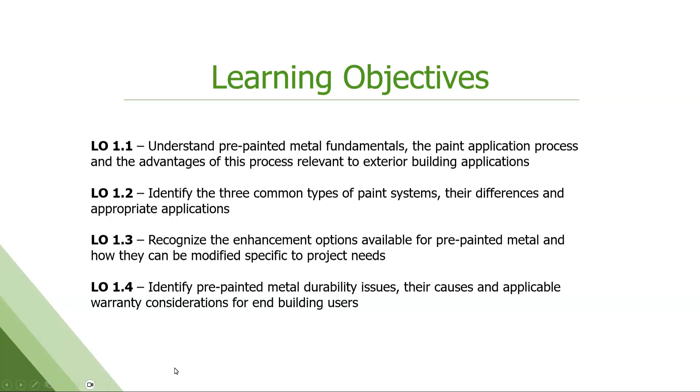So again, pre-painted metal fundamentals, the application process, how we do it. We'll talk about paint systems in detail a bit, their differences and appropriate applications. We got a section about enhancement options, both design aesthetic enhancements, but also performance enhancements that are available. And then we'll wrap it up with durability, warranty, how to maintain these coatings and metal out in the field.

So what is pre-painted metal? I mean, it's pretty self-explanatory. Pre-painted metal is rolls of steel or aluminum, usually, that has paint applied in a factory setting and is baked on. And this occurs prior to any final panels, pieces, parts, and shapes being made out of that roll of steel or aluminum. So not all pre-painted metal is the same. Selecting the right substrate and the right coating, which is what we're going to focus on today, affects product lifespan, energy efficiency, visual appeal, etc.

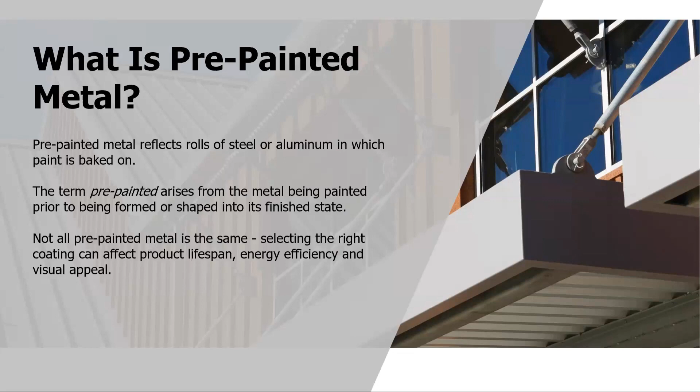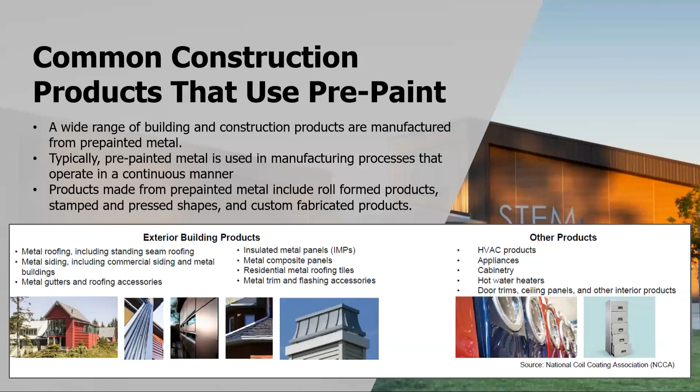Some of the more common construction products that use pre-painted metal, obviously exterior building products, metal roofing, siding, walls, but also gutters and downspouts, accessories that get used in buildings, insulated metal panels, composite panels, trim and flashing. Those are the ones we're going to try to focus on today. But we also use this product in HVAC products, appliances. Almost all of your appliances are pre-painted metal done by the coil coating process, cabinetry, hot water heaters, door trims, window trims, a lot of other interior stuff. Metal furniture is almost all made out of pre-painted metal through the coil process.

It is a continuous process. So we connect one coil end to end to another and keep running as much as possible. But the coil starts out, enters the line, goes through a cleaning section, gets it nice and prepped for receiving paint. We do use a pre-treatment that goes on to create a good bond with the paint. We put a primer on that gets baked on at high temp. After that, the finish coat gets applied again at high temp very quickly.

Speeds are anywhere from 100 up to 700 feet per minute, depending on which specific line we're talking about. So it can be very, very fast. The curing process, that is from the time the paint is applied to the strip until it is dried and fully cured, is 15 to 30 seconds. So these are chemical reactions that are taking place. They are not air dried like house paints that we use.

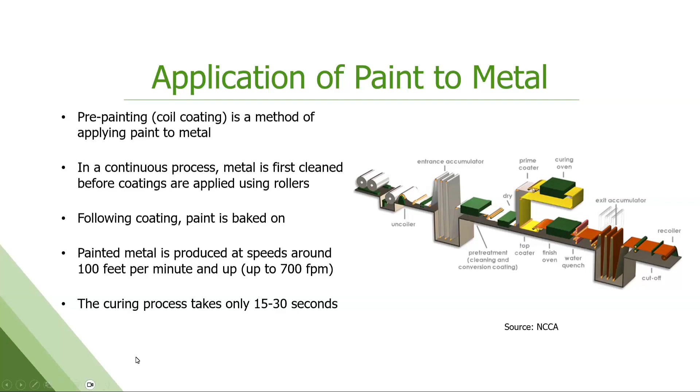If you rolled some of this paint on a piece of metal and set it out in the sunlight, years from now, it would still be wet. It would never actually dry. So very different chemistry. There's a lot of advantages that come with this process, mostly because of the size and the speed in which we do things and the way it's controlled. So it's a very repeatable process. All the processes are very tightly controlled, so we get very good repeatability of the coating and the performance.

It's a very efficient use of paint. So total paint on the top side and the bottom side of the strip is only about 1.4 mils, so 0.0014 inches. That's thinner than paper. We can measure that small and we can reproduce to that. By comparison, most other industrial coatings or metal coatings are 2 to 5 mils in thickness, so a lot more paint that goes on. Another comparison would be cars, right? So cars are kind of in that 3 to 5 mil range of thickness. So a lot more paint is applied.

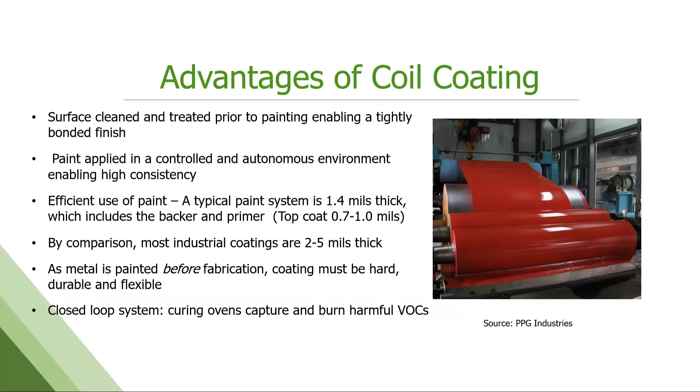All of this is done before fabrication. So these paint systems, these coatings have to be hard, but also durable and flexible to go through the forming process and get made into whatever final panel or piece or part they need to be. It is a closed loop system. So these are solvent-based paints. We're going to talk about that a bit more in detail later, but those solvents are driven off in the ovens and are captured and incinerated and or used to reheat the oven. So it is a closed loop system. The final product is VOC free.

With great speed and size comes some limitations. You know, it's very rapid, it's very large. That makes it difficult to do very small quantities. These lines are anywhere from, say, 1,500 to 3,000 linear feet of product from end to end. So it's very hard to just paint, say, a couple hundred feet. So it's an economy of scale situation.

This can limit the color palette, although I can tell you that Steelscape currently has about, I don't know, 32,000 different colors on file. So not a huge limitation, but, you know, custom colors, exotic colors, small runs are going to cost a lot more and have a lot longer lead time and may actually not be feasible for all coil coaters to do.

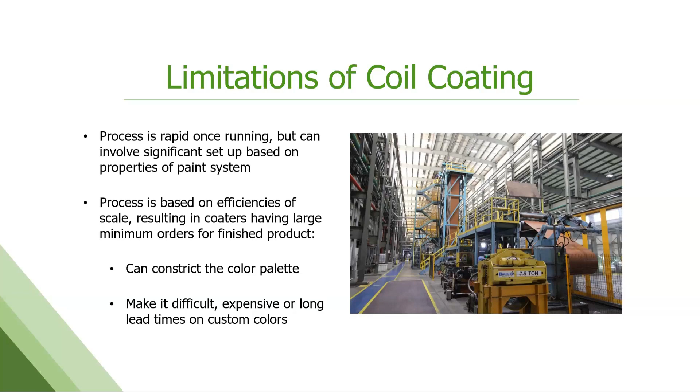Pause here real quick. So again, we talk about how fast it is. You can look up videos online if you're curious. The National Coil Coating Association's got some really good videos on what this looks like and the size of it and how quickly it operates.

Again, a single car today to coat all of its parts is anywhere from 30 minutes to 2 hours, depending on which kind of car and which assembly line it's on. I can run an entire coil of steel enough to produce 4, 5, 6 very large buildings or more in about 15 minutes. So we get a lot of product very, very quickly off the line.

Whoops. Oh my God. Sorry, I went too far.

So quality control - again, we talk about the advantages, really tightly controlled, both the performance and the aesthetic look of it. So we try to simulate the forming it's going to go through downstream to our customers. We bend it, we bump it, we stress it.

We do a lot of color validation and gloss, that's the aesthetic side, right? That color's got to be consistent, not only within a coil, but coil to coil, from edge to edge, from order to order. If I paint red number 5 today, when I paint it again next week, it needs to look exactly the same. There can't be any visual differences to it.

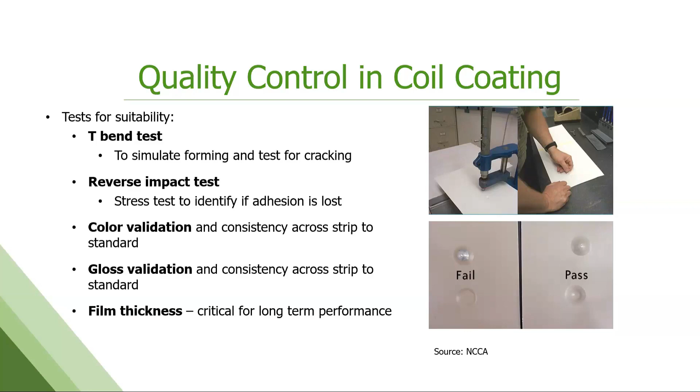I do want to spend a few minutes before we jump into paint, which is the bulk of this presentation, to talk about the substrate underneath, because it's quite important.

Coil coating, like I said, is mostly coated steel or aluminum - I'm going to focus on steel here. It's either galvanized, which is a zinc coating, metallic coated steel, or an aluminum zinc coating, which would be galvalume or zincalume. Those are trade names you'll see out there that are specified and written into specs. It's a 55% aluminum zinc metallic coating that has superior corrosion resistance compared to galvanized. There's a whole other AIA presentation on that if anyone's interested, that I do. But you will see these trademark names in the specs from time to time.

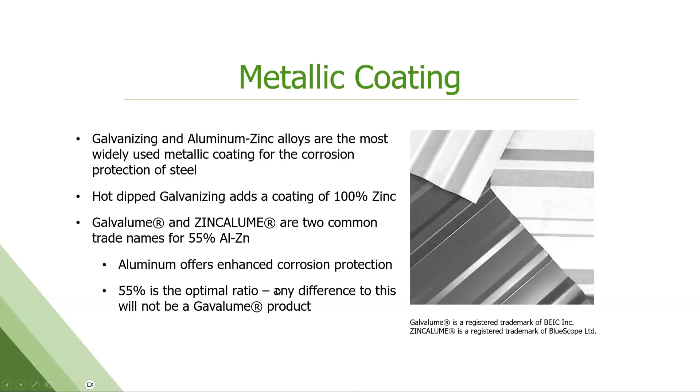We do this in a similar fashion as painting - it is a continuous line, moves very, very fast. They're actually much larger than the paint lines and move much faster, like 300 to 500 feet per minute or more. We're annealing the steel prior to metallic coating to get the properties that we need of the steel, and what its yield is going to be, how elastic it is, how it's going to form. And then we're also applying this metallic coating on that same line.

Different coating weights are available, and they affect warranty and how you're going to use it. Most galvalume or aluminum zinc metallic coating at this point is - I actually need to update this - 20-25 years, it's actually going to move up to like 40-50 years just in the recent months on this product, so I need to update that. But where you install this product is going to affect that warranty, and again, at the end of the presentation, we'll talk about that a bit more.

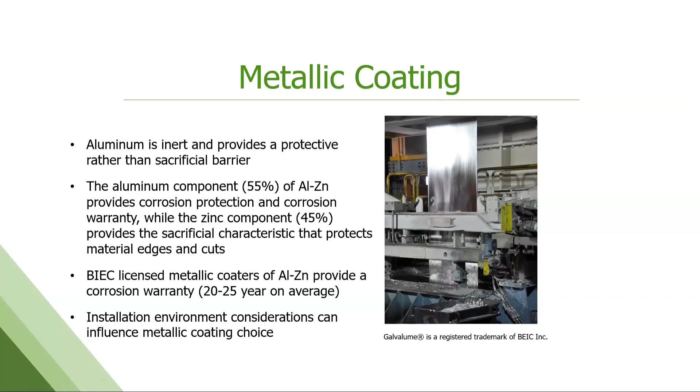Okay, paint - what is paint? We all know what paint is, right? We've all dealt with it. It's a liquid, you apply it to a surface, it needs to cure and dry into a solid film. We want it to protect the surface, and we want it to look a certain way. We want to design with it, we want to create with it. So it needs to have the right color and the right look and the right gloss. Maybe it's sparkly, maybe it's a matte finish, whatever the designer wants.

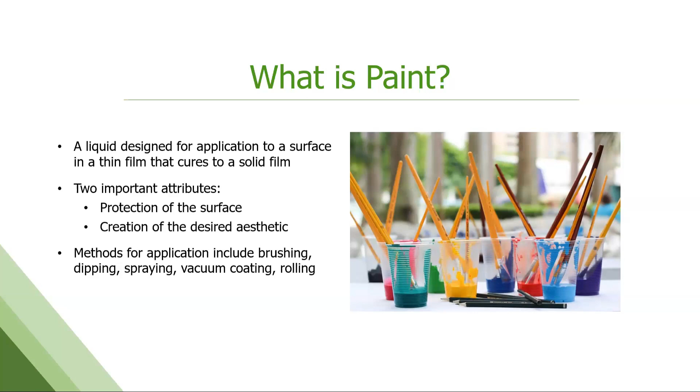There are 4 primary components of paint. Resins, also called the polymer, because we couldn't settle on just one name - this is the binder of the paint, this is the backbone of the paint. It is going to determine most of the physical and chemical properties of that coating.

Pigment, that's going to be the color - the fun part, makes it look a certain way. Our coatings are solvent-based, right? We've got to make them liquid. We use petroleum solvents mostly for this - we've got to dissolve those solids, have it in a liquid state that's easy to handle, to move from drum onto the coater head, easy to mix. And then there's additives.

These are small quantity things that are added to fine-tune performance characteristics of the final film.

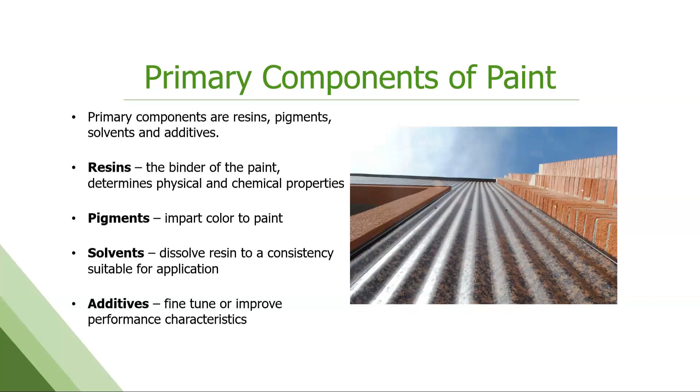So it's kind of how they break down and what they bring to the table, right? These are the players. Your resin is going to be mostly your physical properties: durability, hardness, flexibility, adhesion, gloss, chemical resistance, corrosion resistance, all that good stuff. It has to be able to withstand the elements.

Your pigment's going to be mostly color. You need it to hide whatever it is you're putting it on, in this case, coated steel. You can improve corrosion resistance with your pigment selection as well. It does contribute to film strength and water resistance.

And then again, the solvent is really for those of us on the application side who are making this product. It's about the viscosity, pumping it from drum into coater head, how it flows out on the strip. We need it to flow evenly and consistently onto the strip so that that film thickness is always the same. We can control that - it doesn't cause us any defects.

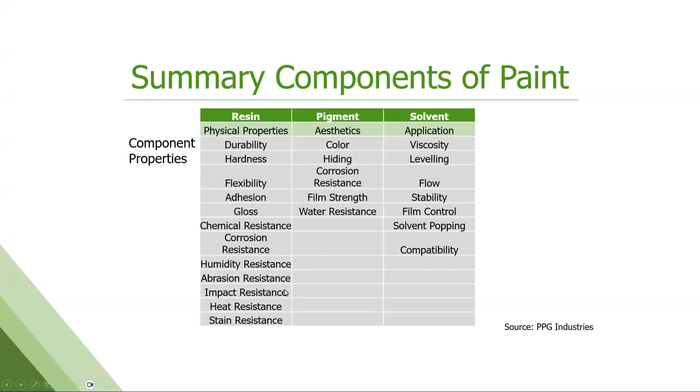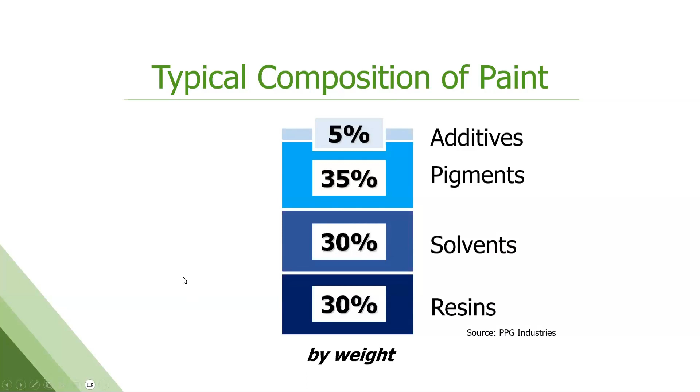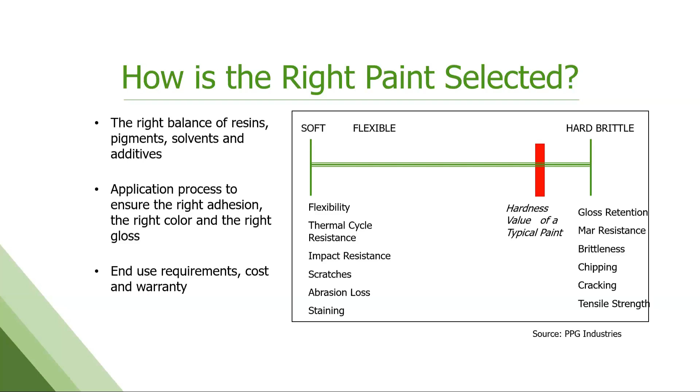So how do you know what paint you need? Well, it's kind of a balancing act of all of these things. But for most exterior building products, pre-painted building products, you need to lean a little bit to the hard side of that film, but still have some flexibility. If you get too far over to that soft, flexible side, you're going to lose some of your long-term performance characteristics once it's exposed to weathering. So most of our coil coatings lean a little bit to the right of this chart, but there's a lot of room within the formulations all across this scale, depending on what you need.

Pigments and color, the fun part, right? These are insoluble solid particles that impart color. We disperse them very finely. We want to get the pigments down to their very smallest stable state as far as size, and disperse it across the resin so you get a nice even appearance. We use two kinds of pigments in this world, organic and inorganic.

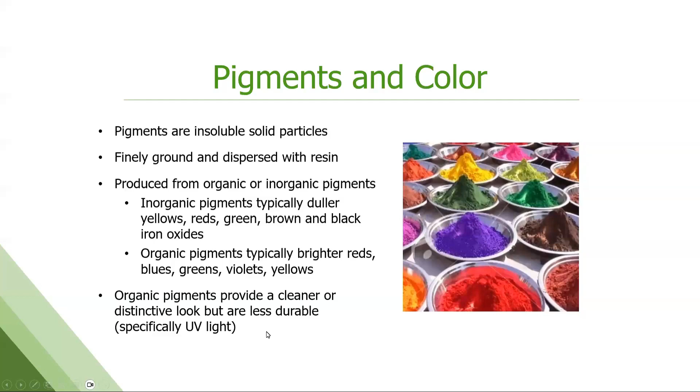The application of color is really important, how we measure it, how the eye sees it. This is something we spend a lot of time on in our world. We do this numerically as much as possible with computers. It's an LAB number - the red-green scale, the yellow-blue scale, the light-dark scale. There's a standard that we read every order to, a master standard color that we're targeting, and we don't want to deviate more than plus or minus 0.5 off of that.

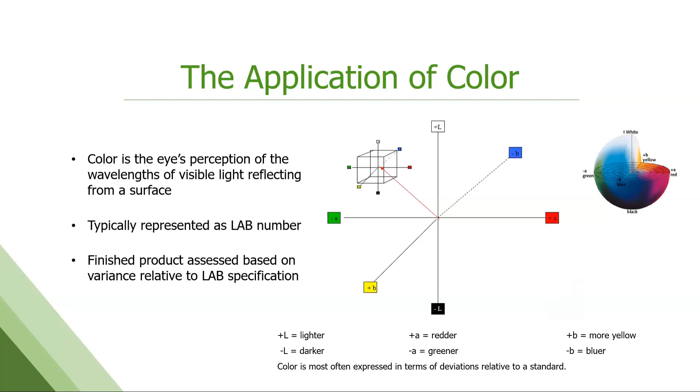The human eye doesn't really start to perceive color difference until we get to a 1 unit color change, which is why we operate at that 0.5 level in production, so that no one can see it. It takes a really trained eye over time to even pick up subtle 1 unit differences.

Now, we don't use just one paint, we use several different paints to get the final product. So in our core, we have our coated steel. After that, we apply a pre-treatment on both sides - it's going to help create some bite and bonding to the surface of the paint. After that, we apply a primer. The primer does a lot - there's a lot of corrosion protection that comes with that primer. It also helps with the adhesion of the top coat, and can help with flexibility of the final product as well.

Then we put our top coat on. On the bottom side, the backer side, you also put a layer of paint over that primer - we'll talk about that a little bit more as to why we do that, a couple different reasons. On your top side, the side that's exposed and will show, you may also have a clear coat, and we'll talk more about that in the enhancement section as to when and why you would want a clear coat on your product. It's not needed all the time, it is optional.

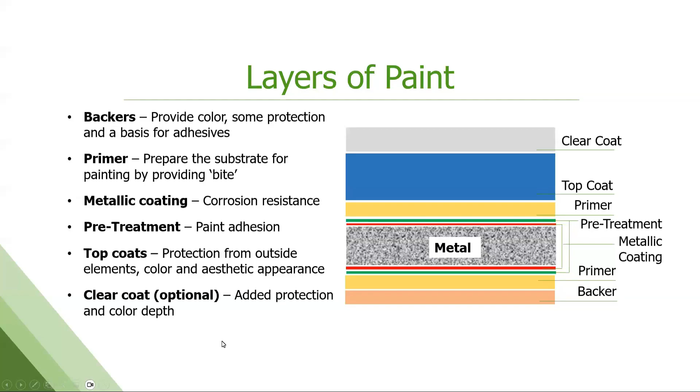Okay, common paint systems and their differences. So, what I should hold on here before I get into this question - that's the end of our first section. Any questions? It's a lot, I know.

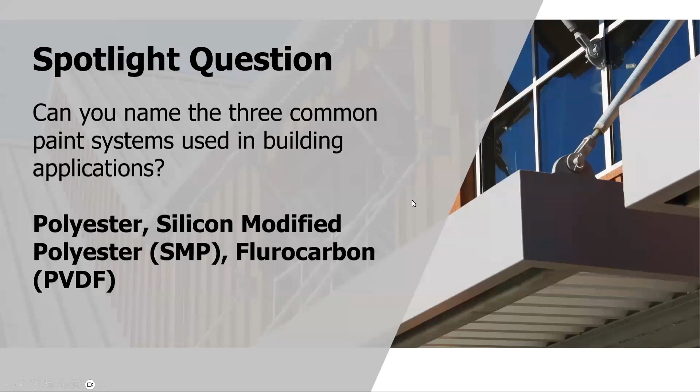Thanks, good questions. So next, what are the three common paint systems we use for building applications? These are polyester, silicone modified polyester or SMP, and then fluorocarbon or PVDF, which you just heard about in some of the questions. We will dig into these a bit further to try to understand how they're different and why we have three different paint systems.

Fortunately, polyester is pretty straightforward—that's just polyesters. Silicone modified polyesters you usually refer to as SMPs, that makes sense. Fluorocarbons gets a little confusing—we as an industry decided to have about five different names for this paint system. So fluorocarbon, PVDF, polyvinylidene fluoride—a little bit of chemistry for you, that's the actual chemical name for it. You may see it out there in the specs as Kynar 500 or Hylar 5000 systems, and that is a licensed, trademarked technology for high-end architectural buildings, using a very specific resin that has to be used.

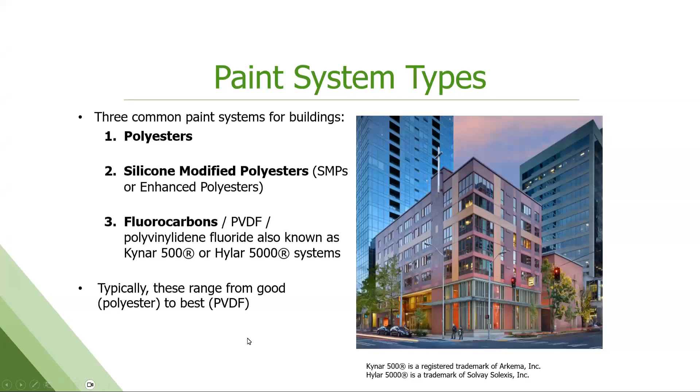They're kind of listed here from good to best as far as overall performance and durability. Polyesters are really the workhorses of the coil coating industry at the end of the day. They're very cost effective, have really great flexibility but also great hardness, and a wide range of color and gloss options—you can get really high gloss if you want out of these polyesters. Very versatile, you can formulate these in a tremendous range of finished characteristics. So your appliances, interior stuff, door trims, window trims, T-bar for ceilings, appliances are all going to be polyester, so they don't need outstanding exterior weatherability. But if you use the right pigmentation, really good pigmentation, with modern polyester chemistry, you can get a pretty good warrantable exterior product out of them.

So we do see them for metal outbuildings, maybe barns, metal roofing—a lot of it's used. All your gutters and downspouts are almost always polyester, again light agricultural, appliance wrappers. I like to try to equate polyester—so polyester is a type of chemistry, it's a type of molecule.

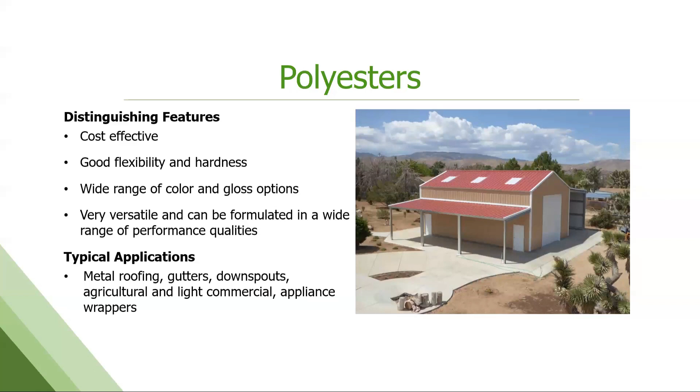Think about your polyester clothing you wear. That's the same base chemistry as these paints that we're putting on a building that's going to weather for 25, 30 years. So it's a huge class of chemistry, a lot of options available. Lots and lots of different monomers you can react together to get different properties. So a lot of different uses.

Silicone modified polyesters is exactly what the name implies. These are polyesters that we've taken and we've added some silicone, reacted it into the backbone of that polymer, if you will. When you do that, and you do it in the right ratio, you get kind of a step up in performance and durability in the exterior world.

So you get really good weatherability, better resistance to chalk and fade. Again, you can still get a wide range of colors and gloss. And it's a little bit lower cost than the PVDF or the Kynar we're going to talk about. So this is a really good product. We see this a lot in light commercial and a lot in residential sidewall and roofing applications because it does have really good performance. It's a good cost point. Everyone makes one, everyone can run it. You can get just about any color that you want.

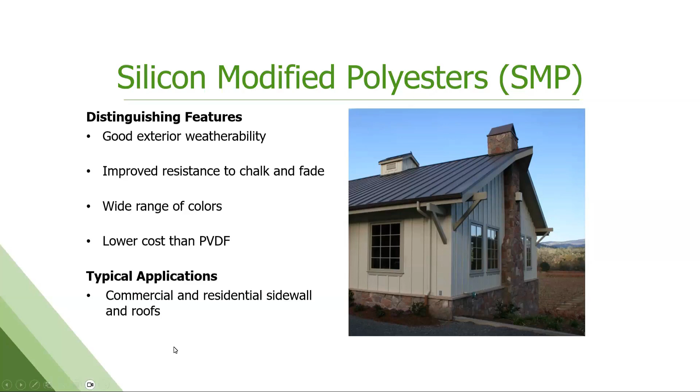The fluorocarbons, so these are kind of the PVDFs, the Cadillacs of the paint world. They go by several different names, again, sorry for the confusion. Exceptional chalk and fade resistance, holds up really well in aggressive environments and elements. Great chemical resistance as well. Excellent formability. So you will see these specified for commercial building applications, monumental buildings, government projects, military projects, is all going to be PVDF or Kynar 500 fluorocarbons.

To relate this to things that we see every day, the PVDF molecule is only 1-2 atoms different than Teflon. It's in the same family as Teflon. We all got pans that are made out of Teflon, right? Just last forever, kind of indestructible at the end of the day. They do not break down. So great coatings, but higher cost.

Got to have licensed technology to make it. I will talk a little bit about this, because it's probably going to come up, there's been some shortages of PVDF in the world the last couple of years. It's better now than it was 2 years ago. They use PVDF, this fluorocarbon technology, this resin backbone, in the lithium ion batteries for electric cars. So there's been huge demand for this product that we've not seen up until the last few years that just continues to rise exponentially. So a lot of work being done by the makers of this product to get more capacity online globally because there's a lot of demand for it in the battery world. And I don't think electric cars are going to go away anytime soon. So it's just going to continue to increase.

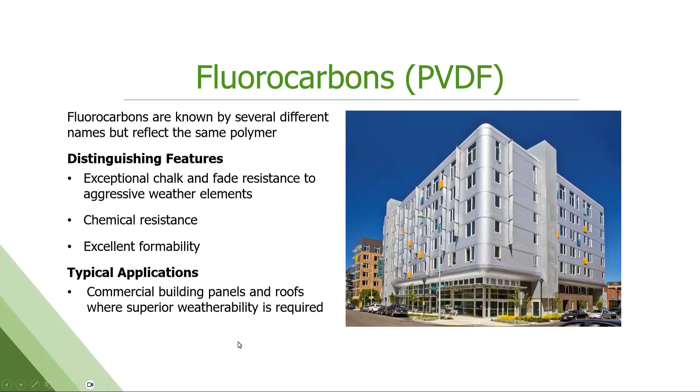I think it's worth mentioning that I would say in the last 15 years, the differences between high-end polyester and SMP has shrunk, that gap has closed tremendously. And the gap between SMP and PVDF has closed as well. It's really because the resin chemistry, the polymer chemistry got better for polyesters and SMPs, but it's also around the pigmentation. So if you take a good SMP and you put the top of the line pigments that are getting used in a PVDF in it, you get a much closer performance to the PVDF. So there's some variables there, but yeah, the gaps have shrunk. When I first started, I won't say how many years ago, the gap was pretty big between polyester, SMP, and PVDF.

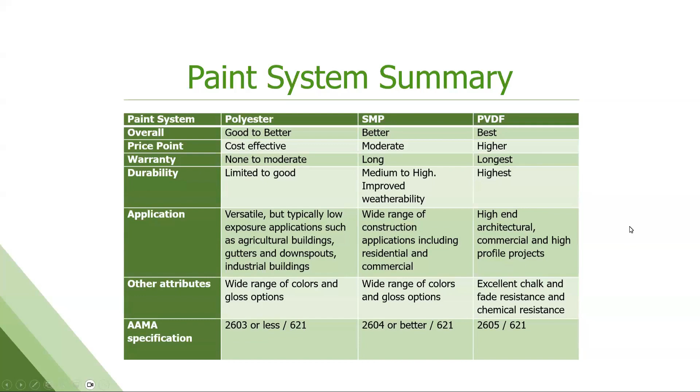So what do you need to consider if you're going to spec or you see some paint specs and you're trying to decide what kind of coating you want? Again, the difference now is becoming marginal, but the best is still your PVDF, especially in a harsher or extreme environment. The Kynar 500, Hylar 5000 name is written into the specs, kind of hard to get around that, and it's in the Corps of Engineers spec as well. When dealing with PVDF, to call it Kynar or Hylar, it has to be 70% of the overall resin composition of the paint system. You can use less than that, but you cannot call it by those trade names. So there's some rules the paint suppliers have to adhere to in order to use those names.

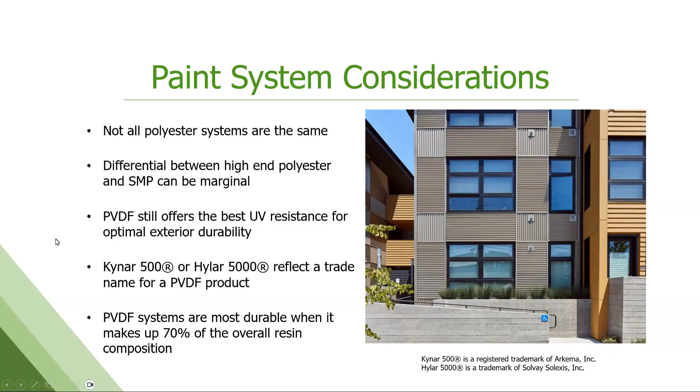Okay, so let's stop there and take some questions. It's a lot to cover very quickly.

First question: can you discuss FEVE, physical differences to PVDF, cost difference, what's the trends and why? That's a loaded question. They're in the same class and chemical family, both fluorocarbon, but they are different molecules, different polymers, with pretty similar performance. FEVE is a liquid base, PVDF is a solid. You can get higher gloss with FEVE. A lot of the clears are done with FEVE because you can get a clearer, crisper look out of it than PVDF when formulating with it.

It has traditionally been much higher cost than PVDF, which is why we don't see it used very often. There was a move to it a bit with the PVDF shortage. We've seen some colors and paint palettes, depending on supplier and users, switch to FEVE because of the PVDF shortage, but it still tends to be higher priced for the most part. It's a little bit lower solids too, normally we don't get as much coverage out of a drum of paint with it as we do with PVDF. So on our production side, which doesn't impact anyone downstream, there's some differences, but it's not as widely used as PVDF.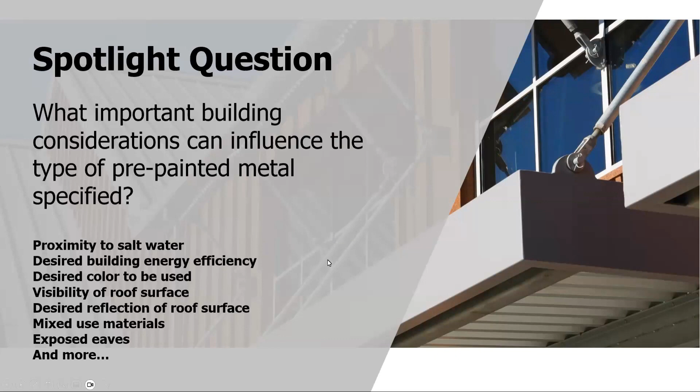Here's our question we just had: proximity to salt water, that's a huge one, especially for those of us whose life is consumed out here on the West Coast or along the Gulf Coast. Desired building energy efficiency, the color you want to use, how visible is the roof, what are the sight lines, what are the elevations, that reflection off of there, what other materials are you going to use in conjunction—there are some cautions about mixing materials together—exposed eaves, unexposed areas, a lot. We're not going to cover them all, but we'll get to the big ones.

So there's a wide variety of enhancements available, depending on what you need or want. So micas and metallic pigments, we talked about that. That's an effect, right? So you get that kind of sparkly pearlescent paint. This would also be your color change. Pigmentation falls into this category as well, right? You view it from one angle, it's one color, you move around, it changes color.

Clear coats. Clear coats can help with marine locations. Graffiti resistance, that can be built into a clear coat technology. Cool roof pigmentation, so pigments that stay cooler in the sunlight, goes to your energy efficiency. A lot of that's been written into building codes now, especially in California and the Southwest.

Texture, we're seeing a move towards textured paints for a couple of reasons. One, the look, but it also kind of kills the glare and the reflection off of painted metal, which can be objectionable depending on where you live and what you're around and the other materials you're using with it.

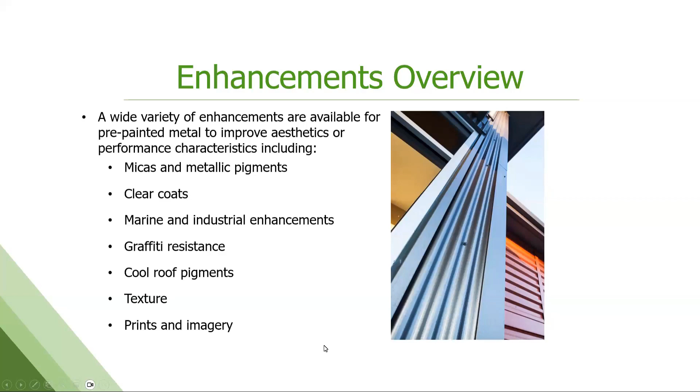You can also do prints and imagery. It doesn't have to be a single solid color. We can do mixed colors, patterns, and you can actually, we'll see it, you can actually print images on these coatings as well. So the micas and metallics.

Historically, we used actual metal flakes to get this look, which is why they're called metallics, but most companies don't use those anymore because they don't weather very well. If you use a true metallic pigmentation, you have to have a clear coat for performance characteristics. So everyone's gone to the micas and the pearlescents, which don't require a clear coat.

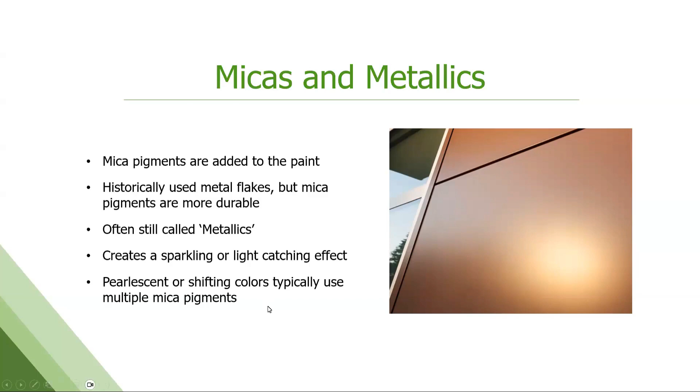And yeah, they are batch sensitive. That question came up earlier. These are batch sensitive still. The industry, the paint suppliers all the way through the application side, are not to a point where we can reproduce these colors exactly from run to run. It has to do with the orientation of those pigment particles and how they lay out on the strip, and the fact that we are coating in a directional manner. So there's directionality to them, which is a caution here. This is why you don't mix.

So a couple of examples here, batch to batch differences, but because of the directional, how they get installed, they might look different. So these two issues here are actually direction. These panels all came out of the same coil painted at the same time, but some panels got switched in their direction. So now they visually look like a different color because of the way those pigments reflect light. Not as obvious on the right here, but you can see that there's some subtle shade differences from panel to panel, and that's an orientation issue.

So the coil coaters can often help overcome this by, on the back side, branding with directional arrows, so you know what direction they should all be facing or going when you make panels.

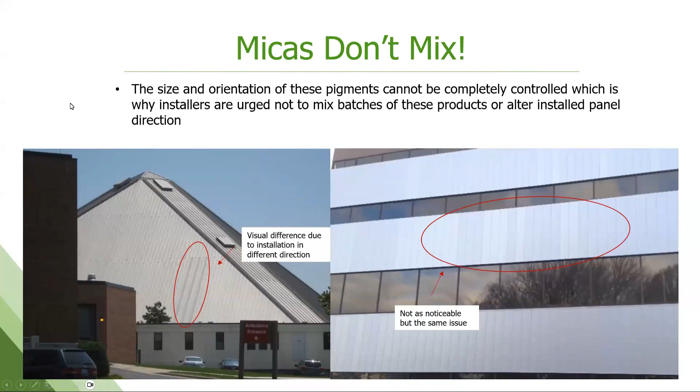Okay, extreme environmental enhancements. This is probably the biggest one I deal with in my world, and that most panel manufacturers deal with, especially along our coastal regions. So yes, you can get pre-painted metal systems modified for specific environments, including coastal. You're usually going to have to go with a higher build primer, so a special primer for marine locations. It's at a higher film. You may also have to put a clear coat over the color coat to get warranty. These are 3 to 4 coat systems. You may have to increase the film on the backside as well. You should be able to get a warranty though.

The definition of marine, definition of saltwater, does vary by paint supplier a little bit, which is why my recommendation is if you're within a mile of breaking surf or saltwater, you need to have the conversation early on with whoever your supply chain is going to be about what they consider a marine environment. I see it everywhere. It is as close as 1,000 feet. As long as you're 1,000 feet or more, you're good to go. You don't need a marine paint system. Some of my supply chain defines it as 1 mile. So it's not consistent. So yeah, just because you see it in one place, say it's a half mile, doesn't mean that the next supplier, coil coater or paint supplier, has the same definition.

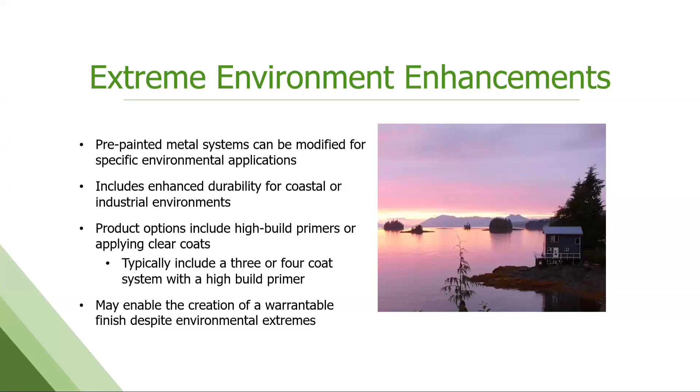Clear coats, right? So clear coats can add kind of depth or a certain look to your product, but it can also bring performance, not only with helping with corrosion performance, but graffiti resistance, right? So there's special clear coats out there that really kind of nothing sticks to them. They're really impervious. They're very slick. It's hard to get any kind of graffiti or coating to stick to them. But if something does get on them, they are also very easy to clean off and wipe clean quite well.

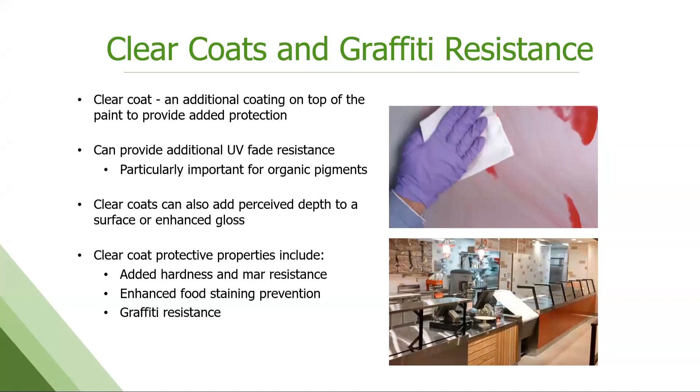We also can use clear coats to get added hardness or mar resistance to protect around food staining. So in food display applications, there's often a clear coat used, and then the graffiti. I will say that when we say a clear coat in our world, they're not 100% completely clear and translucent. They have a slight yellow undertone to them. That is because of the, quote, transparent kind of sunscreen UV blocking particles that are in there.

So on lighter colors, in this photo here on the left is just a normal paint system, a white and a red, no clear coat. The middle samples have high build primer underneath them, so for a marine environment, and then the samples on the right have a clear coat added. You can see that on the light color, there's a slight visual shift in the color as you apply that clear coat, but in your medium and darker tones, you won't notice it.

And this is just kind of a heads up. There's no way around that. If we went with a completely translucent, completely clear coat, you wouldn't get the enhanced performance that you need out of it. So it does shift the visual color a little bit. If it's objectionable on a lighter color, the paint companies can reformulate the color coat that's there to offset that yellowness. So you can have that conversation, but it's usually a very minor difference. Unless you point it out to someone, they usually don't notice it.

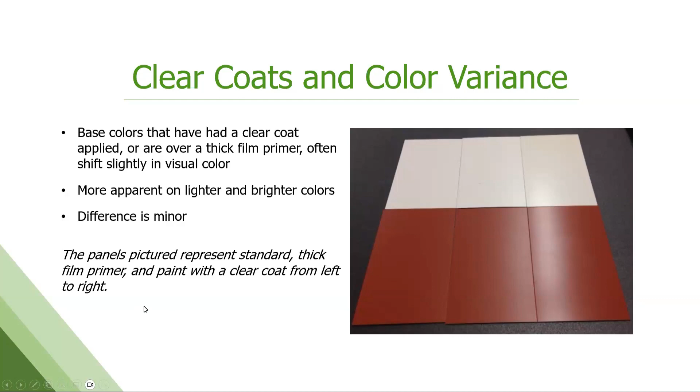Backers, we had questions around backers earlier, so we do have a section on backers. It's often an overlooked item and underappreciated. Backers don't get a lot of love, usually because they're not seen. It's usually some kind of off-white or light gray color. It is color, we apply it in a consistent film and color, so it always looks the same. Because there are applications like open frame metal buildings where you do see that backside. So you want it to look good, you want it to look consistent.

But we apply it for a couple of reasons. One, if you left it bare, when you wrap that unpainted side up in the coil against the painted side on the top, it can damage the painted side. So we apply it so there's some protection while it's being shipped and handled. It also does help with corrosion performance as well. And then, of course, there's times where you're going to see it.

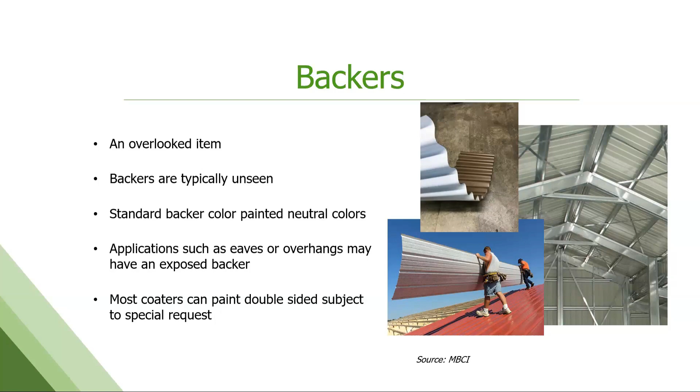And as I said, almost all coaters can double paint, right? So we can paint both sides of the strip the same color, two different colors. We can do full films. I mean, we can do a PVDF full coat, color coat on both sides of the strip if that's desired. It does happen from time to time. It's a lot of like screen walls and other applications where you're going to see that backside and you want it to be a certain color.

Cool colors, right? So this comes from the pigmentation. So cool pigmentation are pigments that have been altered to reflect more IR radiation without changing their visual color. So you can get a dark brown or black. The darker color is still dark in visual color space, but reflecting high IR, so they stay cooler. Any paint system can be modified. If you use these pigments in any type of paint, you're going to get a cool effect.

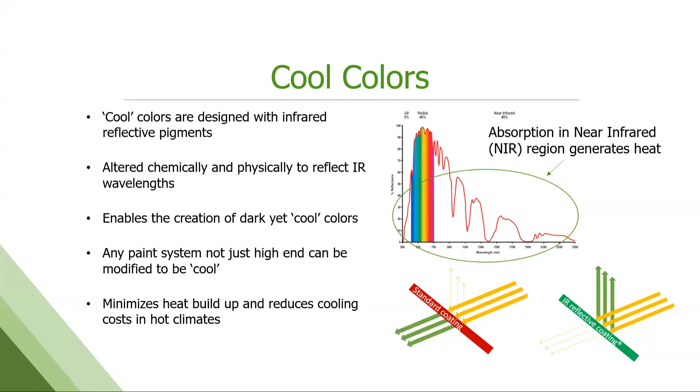It has become pretty standard in our industry. You typically don't have to ask for it, especially in the PVDF coatings anymore. Almost everyone's formulating with cool pigmentation as a standard these days. But when in doubt, ask, and they should be able to tell you specifically what the solar reflectance and emissivity values are for those paints.

Some more. We do have some terms here that get a little confusing. We have solar reflectance. That's the amount of solar radiation being reflected off the surface. That is different than light reflectance. It is different than gloss. We have emissivity. That's the amount of heat a surface dissipates away from itself.

We then have the solar reflectance index, the SRI value. This is what you will see in the LEED specs. This is what you'll see referenced with the Cool Roof Rating Council, Title 24 here in California and other building codes. This is a calculation using the solar reflectance value and the emissivity value together.

It's a very long, nasty equation to get an SRI number. Cool Roof Rating Council: the Energy Star roofing program has been sunsetted now. That's gone. The Cool Roof Rating Council is our third-party independent entity that kind of monitors everyone, keeps us all honest on these values. It does the testing. So I will give a shout out here to pre-painted metal.

Unlike other building products that have kind of a quick deterioration and loss of color over time, that also impacts your solar reflectance. But because these paint systems last so long and maintain their initial color for so long, our aged SRI values, there's typically no change in the first few years, even long-term, no change. So they stay cool for a very long period because they're such good stable paint systems.

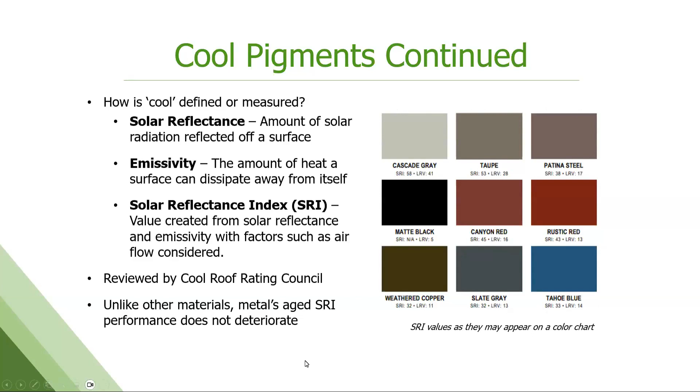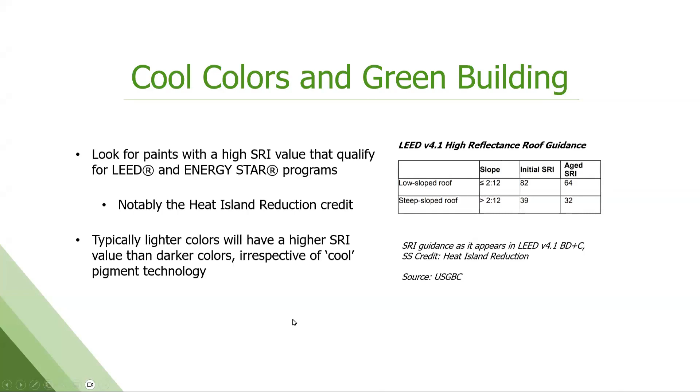Again, there's probably a lot of people on this call that are way more familiar with LEED than I am. I know enough to be dangerous. So low slope, steep slope defined. Initial SRI is 82 for the low slope, 39 for steep slope, aged 64 and 32. The lighter the colors, the higher SRI. You can get to 39 now with cool pigmentation, kind of in the medium range colors as well. That is achievable.

Gloss and sheen. This is something else that's become a hot topic of late. So gloss and sheen are two terms we use to define the visible shine off of a surface and the angle of viewing in which we see it. So 60 degrees is gloss, 85 degrees off the surface is sheen. High gloss, high sheen is a high glare surface, while low gloss, low sheen surfaces have kind of that matte or flat finish. Again, different than LRV, different than SR values.

It can be a bit confusing. We're seeing over the years a trend to move to lower gloss and lower sheens. That's kind of been happening for the last 20, 25 years. Now we're seeing a demand for really no gloss, no sheen value paint, super matte finishes, especially in residential. One, because of how it looks, it blends better with other materials, but also, I love my product, but I don't want to wake up to a neighbor's metal roof blinding me through my windows as the sun comes up in the morning.

So there are areas that have built into their building codes some specs around not having high gloss, high sheen because the neighborhoods don't like it, citizens don't like it. It's been in place for a long time around military bases and airports because you don't want pilots getting blinded by roofs as they're landing or taking off. It's no good for anybody.

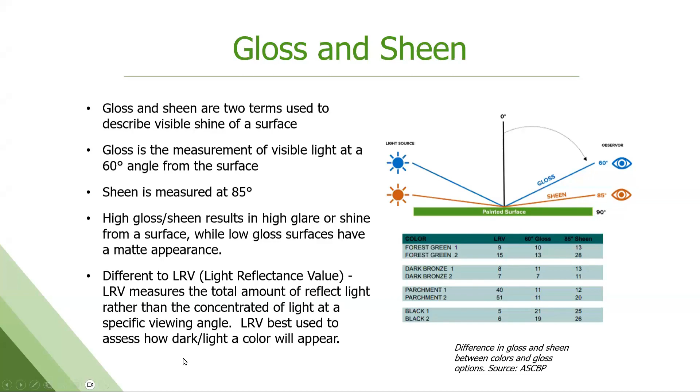So yeah, we just talked about this. How do you lower this gloss and sheen, right? Well, there's a couple techniques. So you can use flattening agents. These are additives. You can texturize the surface. So then that bounces that light reflectance around. You don't get as much coming back at you. This can be done chemically or with actual particles in the paint.

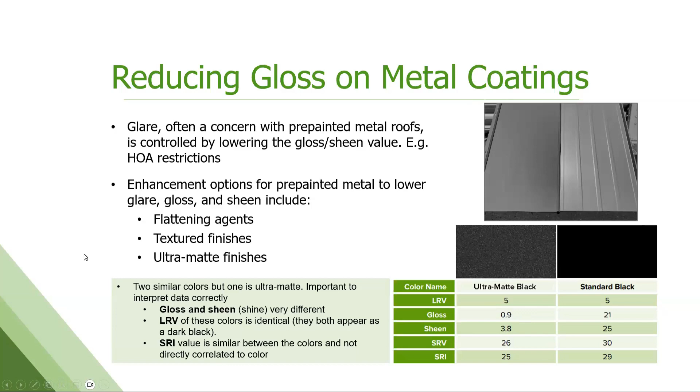The samples here, the panels in the top picture, those are numerically via the color computer the exact same color gray. But you can see how different they look to the human eye because of the low gloss, low sheen on the left, standard gloss and sheen on the right. And again, we have an example here on a black. These are actually the same blacks. They just look different because of the gloss and sheen. LRV is the same. Huge gloss difference, huge sheen difference. SRV and SRI, cool properties, almost exactly the same though, even though we've killed that gloss. So not dependent on each other.

Here's our fun stuff, the prints and the patterns. I really like these. I wish more people would use them. It doesn't have to be a solid color, right? It can be a combination of different colors. Now we have to put the strip back through the line a couple times to achieve this and have special rolls that are etched or laser engraved to get this pattern, but very doable. All the same paint system. So you put a base of, say, your PVDF down of a solid color. You'd come back over it with a contrasting print color to get these kind of patina looks.

You can do wood grain, brushed looks. Pretty short development time to come up with these. We are limited by our roll size, so there is a little bit of a repeat of the pattern. It's one limitation. You see this a lot for exterior roof and wall designs, especially wall designs of late. A lot of prints being used.

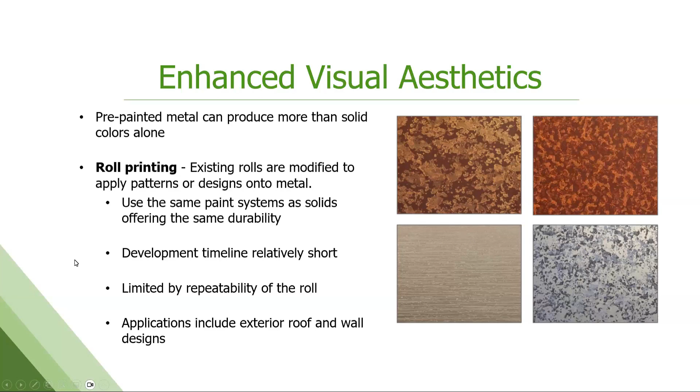There is printing capability in laminates. Laminates are printed decorative sheets, imagery on a film. That film is then bonded to the steel strip. Mostly more for interior, and like for doors, garage doors, that kind of thing. Don't see this too much on the exterior of buildings. It doesn't have as good durability and UV resistance as standard paint systems. That bond of the film to the substrate can break down.

But digital printing—a lot of headway has been made in digital printing in the last few years, using paint systems very similar to our standard PVDFs and SMPs that we're using now. They use it as an ink. It's kind of like a giant printer that sits on your production line and prints an image as the strip is moving. It can be done at large scale. So kind of fun.

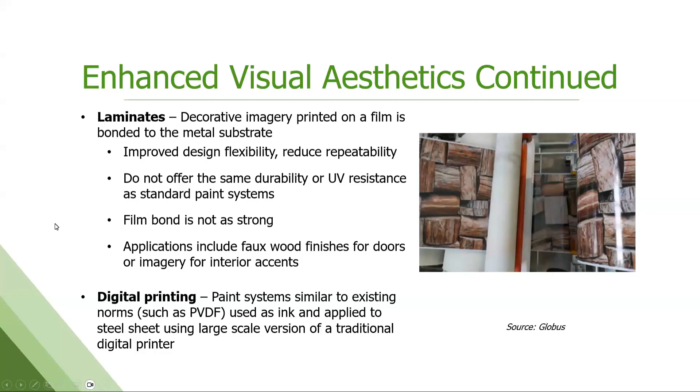Does lower gloss and lower sheen reduce durability? And it seems that a low gloss, low sheen option would reduce the visual effect of oil canning. Okay, great question. So no, the durability is not impacted. It doesn't have any part of that—same warranties, same performance expectations. Now, I will say, chalk and fade may be less noticeable because you're starting at a lower gloss. Your gloss retention difference over time is not going to be as noticeable because you're starting at a low gloss to begin with. So you don't have any gloss to lose to change that appearance over time.

And then the second part, and the other question I get, I'll throw it in there, is around these textured surfaces, these rough surfaces—do they collect dirt? We've not found that. We've done testing out in the desert, and they don't collect dirt or dust any worse or more than a regular painted system. Something that comes up. What was the second part? It was around oil canning, right? Yes, it does. A matte finish, a low gloss, low sheen finish can hide a multitude of sins, including oil canning. It does minimize that look. It's still there, you just don't see it as readily.

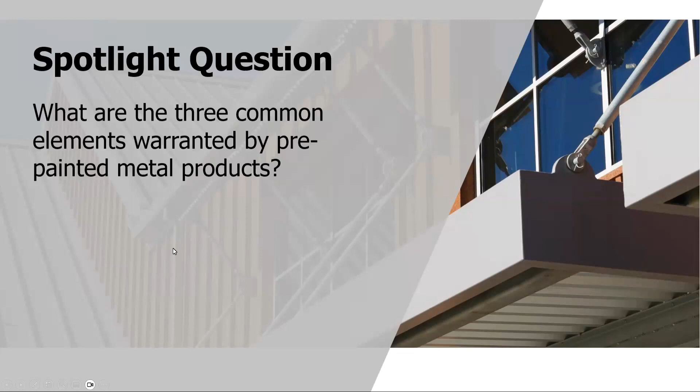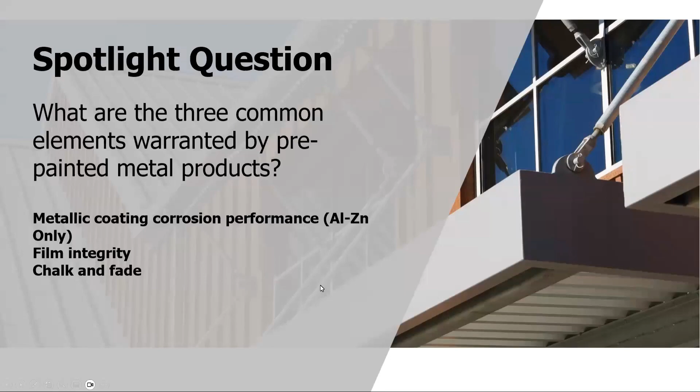So what is warranted on these systems? Typically, you're going to get some kind of warranty. If you're using a Galvalume or Zincalume substrate, you're going to get some kind of corrosion warranty around the substrate. On the paint side, you're going to get film integrity and then chalk and fade. And we'll talk about what those mean. The warranties are anywhere from 5 years up to 40—I think we're seeing some 50-year warranties now on the paint films. It's usually for excessive chalking, excessive color fade, and then delamination of the top coat from the primer to the substrate. That's your film integrity—basically, is the paint going to stick long term?

Failures around these can be due to a lot of different reasons: improper application, issues during installation, it could be a bad paint formula—maybe the coater didn't have good quality control. There could also be environmental conditions that play a part and impact how well it performs. There are significant differences between the paint system types and the warranty coverages.

I've got an example here. This is old, and keep in mind the gap between polyester, SMP, and Kynar has changed, but back in the 80s into the 90s they installed this wall, all using the same visual color to start with in these different paint systems. Checked it 14 years later, and you can see the significant difference in fade of the acrylic and the polyester versus the Kynar and the SMP. So, yeah, they do perform slightly differently. They're not quite this bad now, but if you were to mix an SMP panel with a PVDF panel out in the field, same initial color, same pigmentation, 20, 30 years down the line, they're not going to look exactly the same.

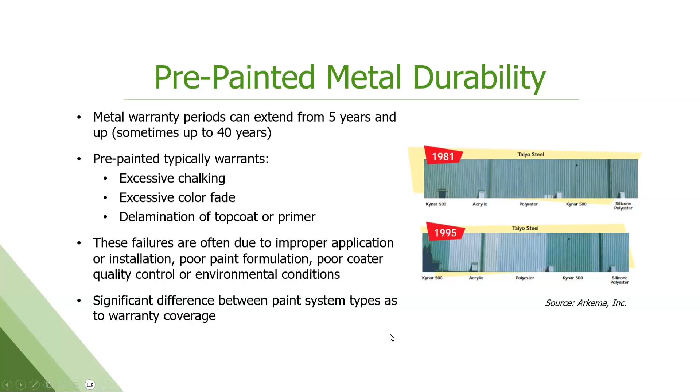Now, they might still be in warranty and doing well, but they're not going to look the same. So chalking is exactly what it sounds like. You actually get a white chalky powder on the surface of the panels. This is degradation of the resin or polymer system, getting broken down into smaller bits and pieces, and then it can come off the surface. It's got some pigment embedded with that, so it gets this white faded appearance. You can wipe your hand on there, your hand will be chalky.

This is done by UV rays. Don't see this very often, I have to say. Kind of rare anymore. Most of even the high-end polyesters, you're not going to see this kind of degradation like you used to. So again, warranties 20 years and plus against chalking.

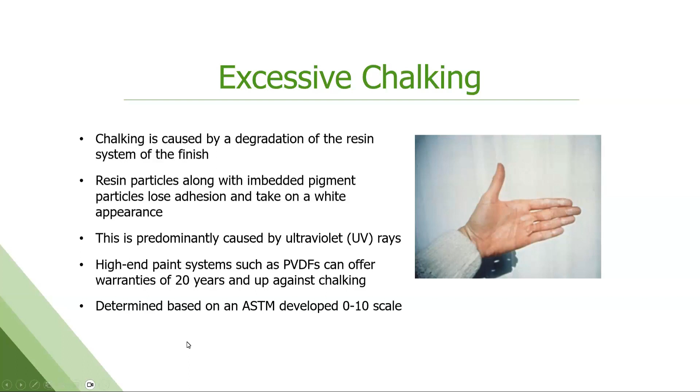There is an ASTM method for measuring this. The higher the number, the better the performance. So a 10 means that there's no chalking at all, and an 8 would mean very, very little chalking. You use either a black or a white velvet material, and you wipe it on the surface, and there's a visual reference that you compare it to, to come up with your chalk rating. So a little bit subjective, but again, don't see it very often anymore.

Color fade. This is the one most people are worried about, right? We want our building to look the same. We don't want to have noticeable fade, and we really don't want it to fade differentially from one part of the building to the other, right? We want it to fade evenly. We know it's going to fade, but we want it to look consistent.

So again, this is UV attack on the pigmentation. We measure it by a number called delta E, which is a numerical color calculation. Most paint systems are warranted with things like allows for a delta E change of 5 units over 20 years. So that means in 20 years it can change up to 5 units and still be under warranty. The human eye doesn't start to see that change until you're between 0.5 and 1 unit delta E. So it takes a little while for the eye to see it.

Your PVDF systems typically have the smallest color change over time of any of them. I put some examples here of what this kind of visually looks like. So at the top is what the color started as, and then we have a 5-unit change in the middle, and then a 7-unit color change at the bottom. Same with the red. Again, we all know reds, dark blues tend to fade a little bit more. Blacks are going to fade a little bit more than lighter colors, or it'll be more obvious.

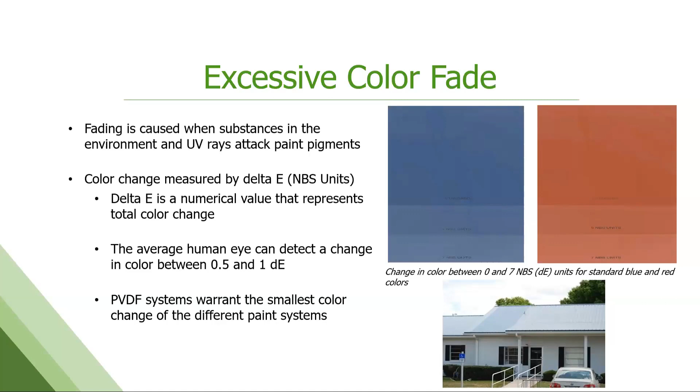The picture I have here, this house, we call these candy cane, or candy stripe, where they're striped like this. There's a couple things that could be going on here. When you have some panels that are performing or fading differently than others, it could be a few things. It could be mixing paint systems — someone could have intermixed, say, PVDF with a polyester, or an SMP with a polyester. It could be that part of these panels were not at the right film thickness when they were made, so they're fading faster. It could be different paint suppliers, right? So blue number 14 from supplier A and supplier B may not be formulated exactly the same, and they may not fade exactly the same. So you don't want to mix suppliers on a building either, because you will get differential performance.

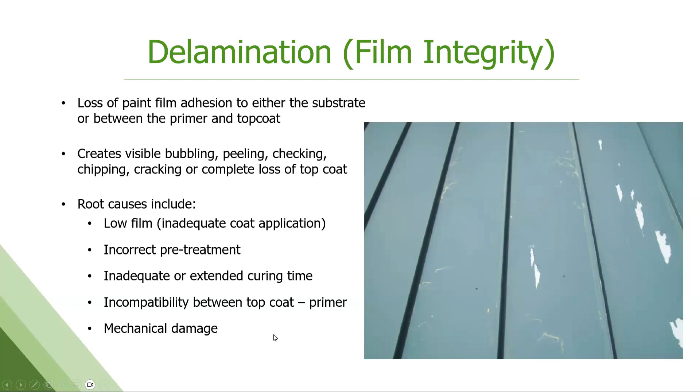We do see issues because of incompatible dissimilar metals. In a corrosive environment, there are certain metals you don't want to mix together in direct contact because it'll cause premature corrosion of one or the other. Using wrong sealants, leaving swarf, which is metal filings from the drilling or cutting process that takes place on these panels on site, that rust leaves a stain on the surface.

Wet stack, this is storage corrosion. So the panels, when they're stored prior to installation, if moisture gets in between those panels and they're not allowed to dry out, you will get premature corrosion starting underneath the paint system.

Paint system then comes off once it's installed. Looks like a failure. Oil canning is not a failure, but it does happen on light gauge rolled steel products, which is kind of that buckling or wave you might see in certain panel designs after installation.

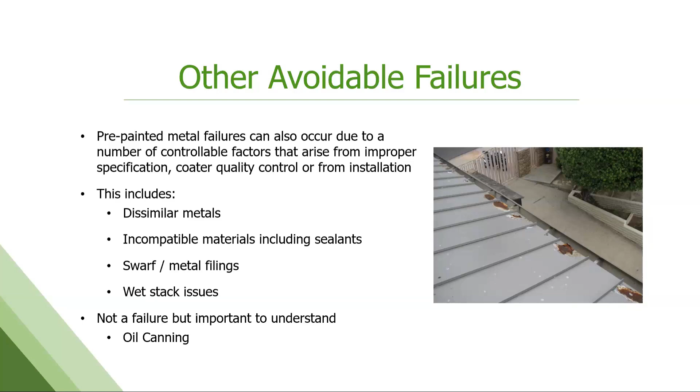Dissimilar metals, a little bit in depth here. Basic galvanic chart: more active on the top, less active on the bottom. The further away they are, the more of a problem you're going to have. This is in corrosive environments, especially marine environments. If they're in direct contact with each other, the more active metal is going to sacrifice itself and corrode prematurely.

This is a stainless steel lighting fixture canister recessed through a galvalume painted panel that is 300 feet off the surf break in San Diego. High salt content, highly corrosive. This lighter area, this rim you see around there, is the paint bubbling off because the substrate underneath is being destroyed and has nothing left to stick to. Dissimilar metal corrosion—not good. We have whole books of technical bulletins and papers on this topic if anyone wants to know more.

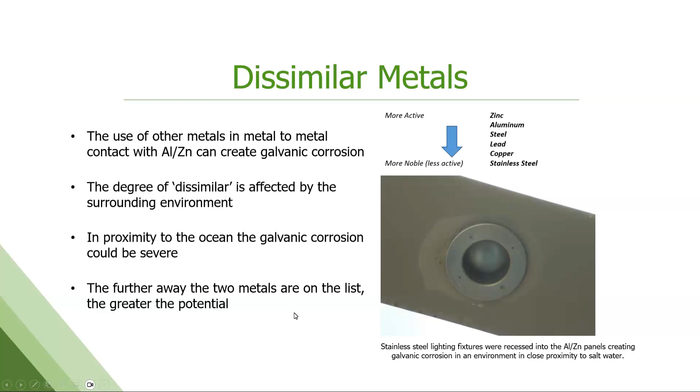Concrete, wet concrete up against these painted panels—you've got to have a water barrier or you get moisture into that steel substrate, which causes corrosion.

Treated wood is a big one. Treated wood, either wet wood that's still damp or wood that's been treated with fire retardants containing copper, is problematic with painted metal. You will get corrosion. This deck right here had treated wood, and the water was running directly off of it onto the metal panels below, causing areas of corrosion. As soon as you got out past the deck where you didn't have that water runoff, the panels were fine.

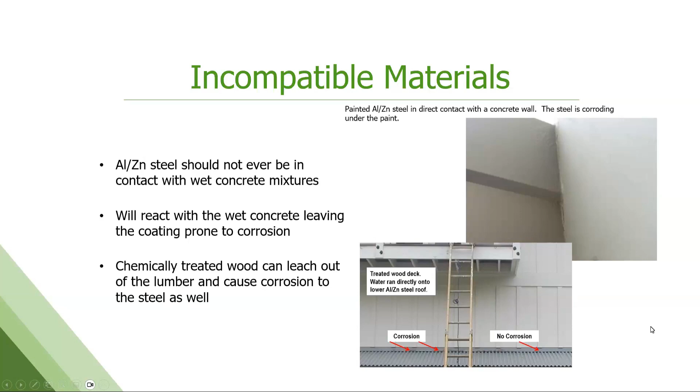Swarf and metal filings, again, these are little shavings of metal from like a screw hole or cutting that don't get cleaned off. Those little metal shavings are now rusting because they're exposed to the environment. This comes to me as, hey, my paint is failing and it just got installed. And then I look at the pictures and I go, nope, those were metal filings that didn't get cleaned off.

This staining that happens on the paint surface is really hard to remove. Not a performance issue long term, but definitely an aesthetic issue that most new building owners are not happy with. So we have a lot of tech bulletins around how to cut, how to clean, the best way to prevent this and to get rid of it if it does occur.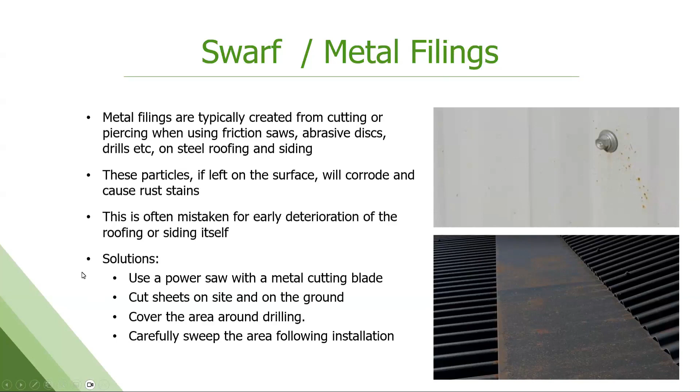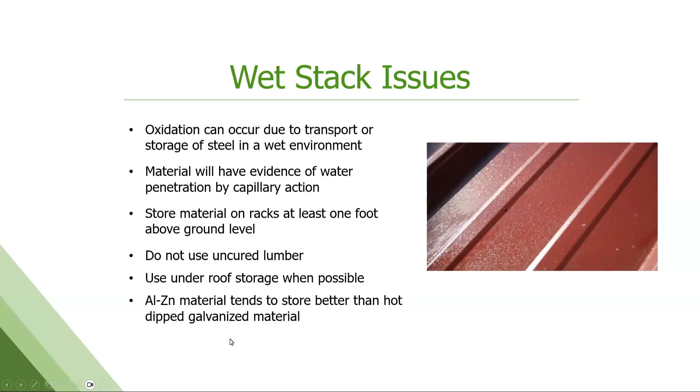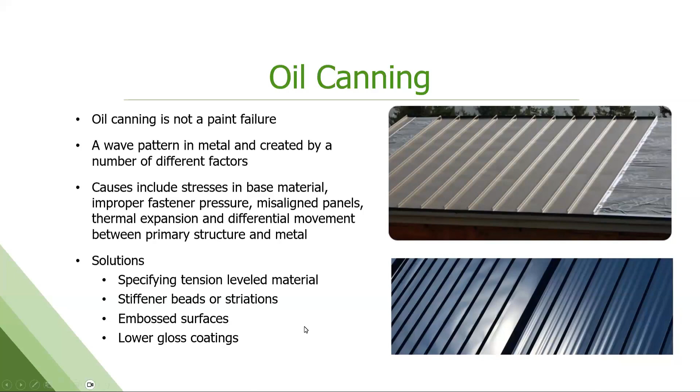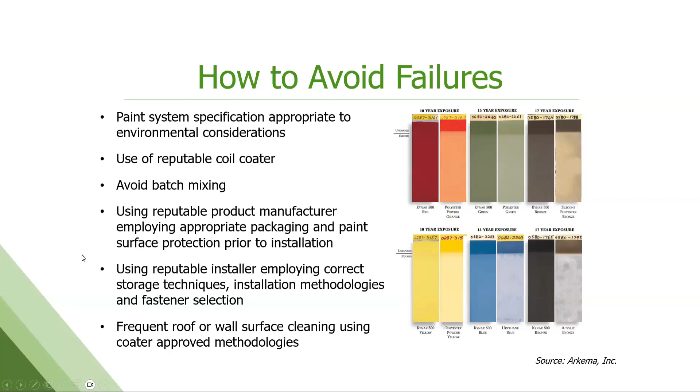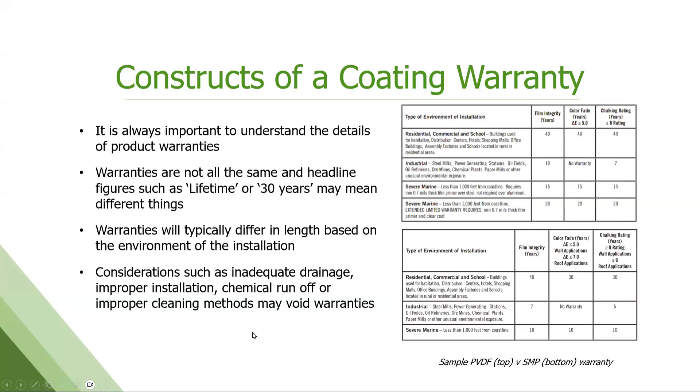The constructs of a coating warranty, just kind of some heads up stuff. They're all a little different. Understand the details, do not get caught up in the headlines. The title might say lifetime or 30 years, 40 years. You got to read further in. What is warranted for the lifetime? Is it prorated? What is warranted for 30 years? How much fade is going to be allowed? How much chalking is going to be allowed? What's the warranty for film integrity might be different than the duration for chalk and fade. So you've got to kind of read past that title into the first few paragraphs at least, please. There should be a definition of marine environment somewhere. It'll have a list of exceptions and considerations as well that you need to be familiar with. So it's a little boring, a lot of legalese, but they're usually one-pagers, so not too bad.

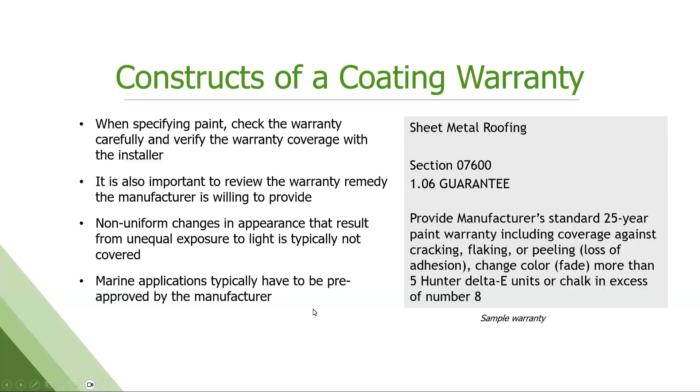Again, more of what I just talked about. We're past our time, so I'll let you guys read that. We're at the end, it's long. I know it's a lot of information. Any questions before we finish up here?

We've got one last question, Michelle, that came in. What should we do if wet stack material shows up on the construction site? Do not install it. You need to contact the panel supplier, and take good pictures, document it, and talk to your panel supplier. If you install it with that condition, the paint will eventually fail. And what's interesting about it is it may be several years before that paint actually starts coming loose, so it can be a delayed failure. Which is then hard because to say to a homeowner, well, it had this condition when it was installed, they go, well, but it's been 5 years and it's been fine, so how could that have happened 5 years ago? So it's a complex conversation. But if you see it at a job site, hold up, don't put it on the building. Call your supplier.